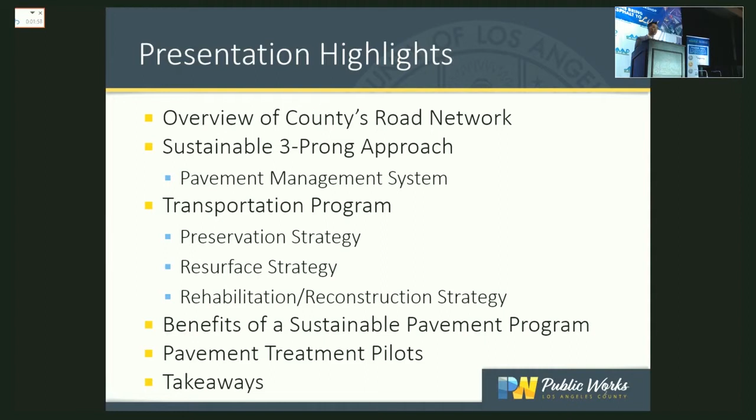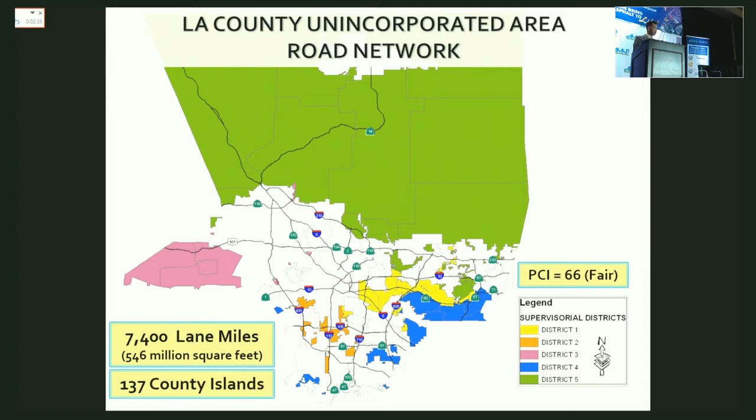Los Angeles County maintains one of the largest county road networks in California. We maintain 7,400 lane miles of all sorts of roads, and the challenge is really spread out across 137 county islands. Our current pavement condition index, PCI, is 66, in fair condition. The different color coding represents the 5 supervisorial districts, the way it's broken down, and the white area is cities, so city of Los Angeles as well as other small cities.

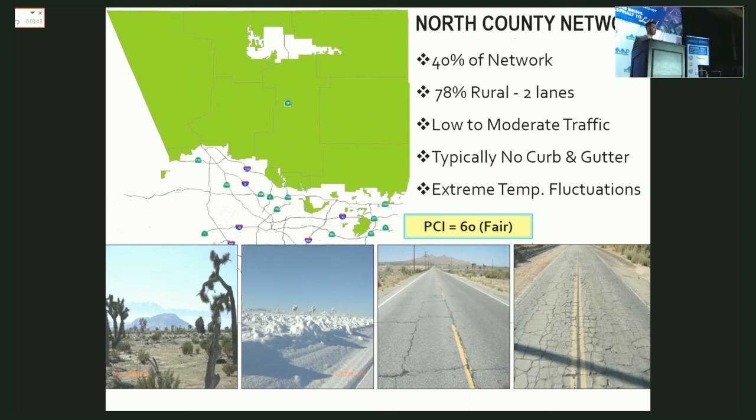So the way our county is broken up is into 2 different regions. In the North County, it's 40% of our network, pretty rural, with very much low to moderate traffic. Obviously, there are some high truck traffic routes as well, and those are pretty challenging. Usually there's no curb and gutter, mostly rural, with extreme temperature fluctuation. In wintertime, we do get snow up there. During the summer season, it's well beyond 110, 120 degrees, so the roads get pretty cracked due to the thermal experience.

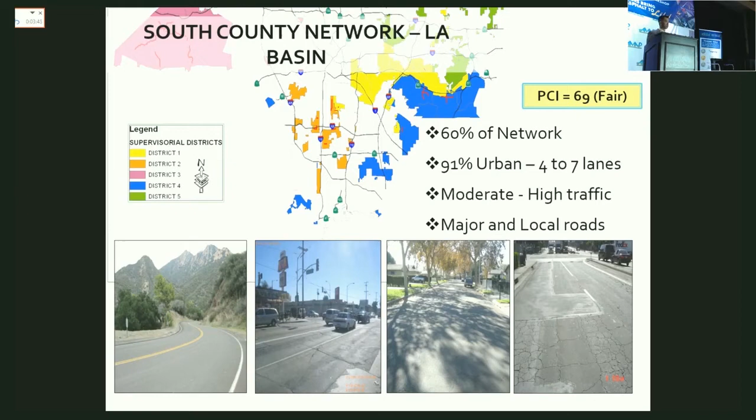Down in the basin, this is the majority of our network, including the Malibu area, which is in pink - that's our District 3. The majority is urbanized, local residential, as well as major arterials. So it's pretty busy down there, and our condition is 69 - generally speaking, in better condition than the North County.

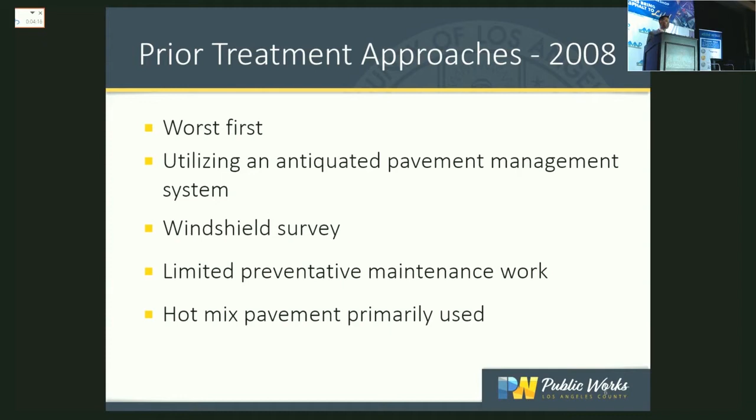Before 2008, we considered ourselves a worst-first organization. We basically waited till roads got into really bad condition before we'd go and fix it. We didn't have a really good pavement management software, and mostly we didn't have a lot of preservation treatment tools that we used. So mostly when we did fix the road, generally speaking it was hot mix overlay, reconstruction - a lot of remove and replace sort of treatment.

With the economy crash around 2008, we pretty much had budgetary issues that we were facing, just like any other public agencies, and we had to figure out a way to do a better job maintaining our roads with limited budgets. At the same time, there was a big push in California to really reduce greenhouse gas. Brandon Miller spoke yesterday a bit about the different Assembly Bills, and Assembly Bill 32 was one that aimed to reduce greenhouse gas basically to 1990 levels by 2020 - this has probably changed since. But from there, we were pretty much looking for ways to do that.

So we basically attended different conferences just like this one and really got to know more about what other agencies are doing, working with and partnering with contractors and material suppliers, and finding ways to really do a better job maintaining the road network and reducing greenhouse gas.

This is what we developed since then - our sustainable three-pronged approach. We really wanted to start with, number one, preserving our pavements when they're in good condition - we're talking about PCI. We also want to preserve roads that are in fair and poor condition. I'll dive into that a little bit more later.

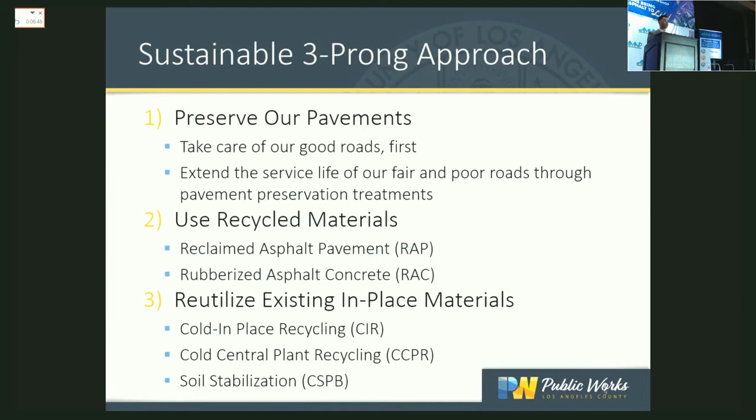With the three-pronged approach, our pavement management system is really what ties everything together. We need to know our network conditions before we can do anything, so having a good, robust pavement management system is key. We keep track of the condition of our whole network, and this software has GIS capability, so we're able to visually see the conditions of our network.

When we do, we collect the data. We have both in-house people that do it, as well as a contractor that does it for us. For the North County, it's a pretty far drive, so we have a contractor collecting pavement condition distresses for us, and those distresses get imported into our pavement management system, which is where the PCI is generated.

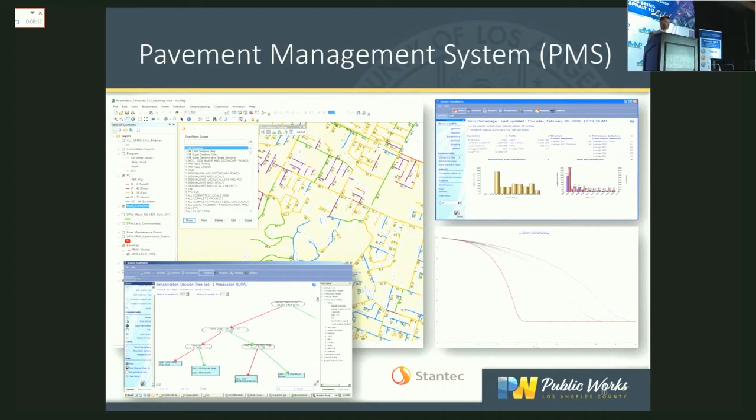This is a set of pavement performance prediction curves in the software, and you're probably familiar with it. Basically every road in the county is tied to one of these curves, and it's correlated to three elements: the pavement structure, the traffic volume, and the subgrade conditions. Depending what it is, it would deteriorate at different rates.

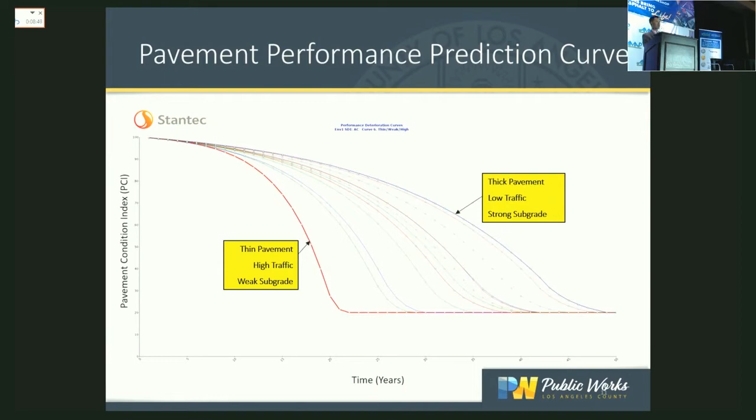Just a quick example: you have a road that has pretty good structure, low traffic, and very good subgrade strength - then you see that deteriorate much slower than the opposite.

This really zooms into a typical performance prediction curve. The way we broke down our conditions, PCI is in 5 different categories. People do it a little bit differently, but from our perspective, the score is from 0 to 100. On the y-axis, you'll see 0 where the roads completely fail, and 100 is like a brand new street. The x-axis is just the time.

The way we were operating before 2008 were really in the red zone, so we're focusing more on the lower end of the curve. We go ahead and fix roads when they're falling apart, but we realized how critical it was to preserve our roads when they're in good conditions.

So with that being said, we do a lot of preservation treatments when roads are in good conditions. You can see in the yellow box where the cost per square foot is very low when you're doing those types of maintenance treatments - talking about 5 cents to 80 cents per square foot.

But at the same time, I mentioned that we do preservation for roads that are in those critical zones. In this graph here, you'll see the dotted zone - those are the critical zones. We want to catch the roads before they get into the next worse conditions, because as the conditions fall into a different category, the cost to repair them is a lot more.

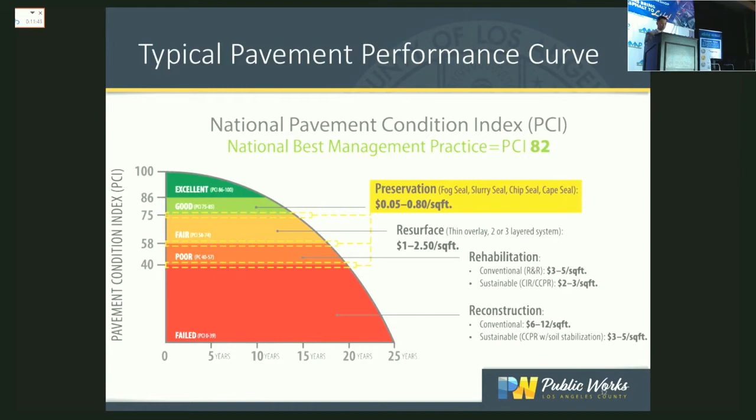Let's talk a little bit about our program. We developed a rolling 5-year plan. In it, you've got all sorts of project areas and different treatments we want to focus on, and it's all driven by PCI. We work with our internal partners to prioritize the different project areas to make sure it's balanced between the supervisory district and the road maintenance district. That's the game we have to play to make sure everybody gets a piece of the funding and road projects.

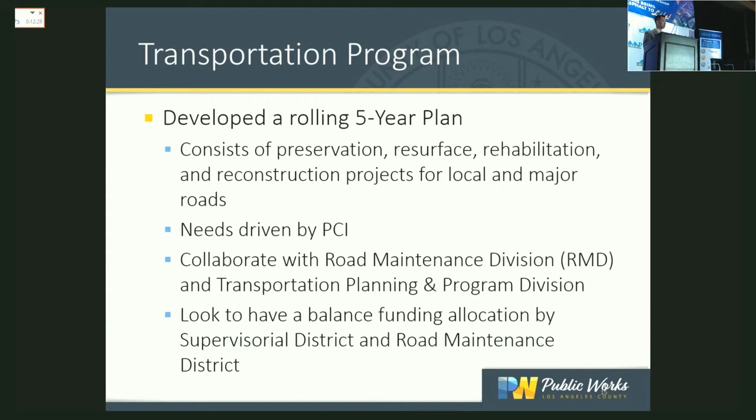So the number one strategy is preservation. Like I mentioned, PCI of 76 and above is in good condition, and we want to use preservation treatment there, things like slurry seal, fog seal, chip seal. But we also use it in fair and poor conditions. When it gets into those conditions, we're looking more into Cape Seal. It's no different, it's the same contractor that does the work, so it's a very cost-effective method to maintain the conditions.

The nice thing I want to share is that we actually use 100% RAP for the seal coat, meaning 100% on the slurry. We use polymer modified emulsion RAP slurry, it's 100% RAP, and the scrub seal, which is a form of chip seal, that's also 100% RAP. And in the micro-surfacing we're also using 100% RAP. The source isn't coming from us, we low bid so contractors come up with the RAP, and we haven't had any problems with that. It's very comparable in cost, so we're not really seeing a difference.

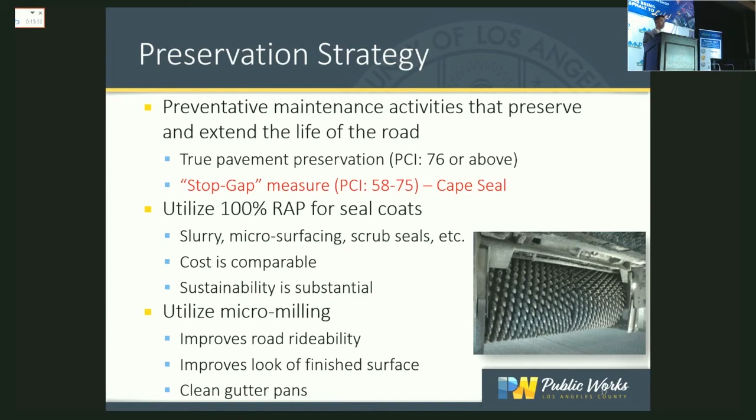Just to highlight, call it a stopgap measure when we're doing a Cape Seal for roads in fair and poor conditions. This is just a table we share, about when we do a seal coat treatment, roads in fair conditions versus worse conditions have a very different expected life. It's different, so it's just knowing that in the back of our mind and sharing that information with our administration so we're all on the same page. Because when we go into a neighborhood or community, roads are deteriorating at different rates, and we're doing everything the same to keep everyone happy, but certain roads are obviously in worse conditions than others. So this table kind of shows you that information.

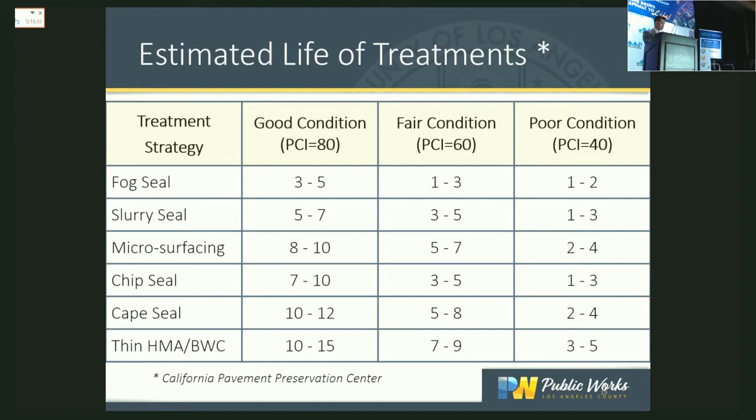So this is a sample project we did about 3 years ago, in one of the communities down in South San Gabriel. What we did was a stopgap measure. Let's go over it quickly: it's 11.7 miles combined, and conditions on average are 59, which is in the lower end of the fair curve, with alligator cracking, transverse and longitudinal cracking. Those are typical cracks we see in residential areas.

What we did was go in, do prep AC digouts for areas in worse condition, and then come back and do either a slurry seal—we used polymer modified emulsions for the slurry seal—or a Cape Seal along with micromilling. The cost of doing this project was 72 cents per square foot, and we were able to cover 1.9 million square feet within that contract cost.

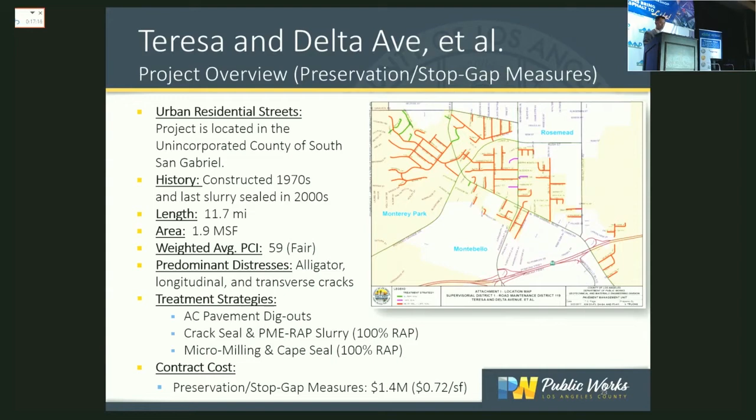Just a few pictures of what it looked like before, what it looked like after we did the micromilling, and then after we applied the scrub seal and slurry seal.

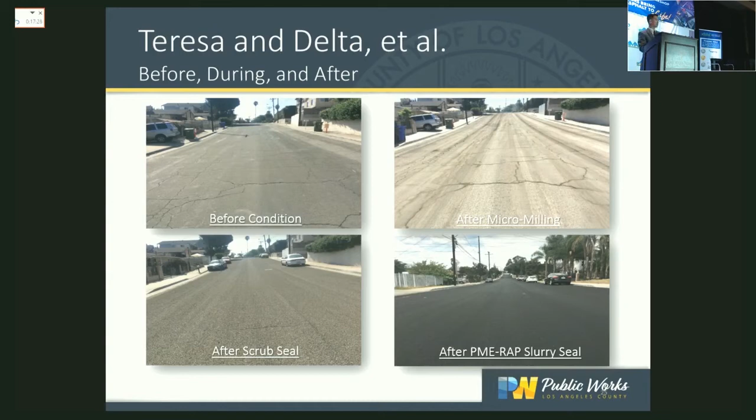The beauty is there's a lot of greenhouse gas reductions when we compare it to a traditional way of fixing these roads, plus energy consumption reduction. The cost comparison is not all straightforward, but we're looking at the life extension from a cape seal to a full reconstruction.

Like I mentioned, a lot of these streets we cannot resurface, so what we're comparing is reconstruction, which is basically a brand new street giving it a 25-year life, versus a cape seal which will generally give it 7 years of life. We scale that back into a single cycle of treatment, and that's the money we're saving - not really saving, but it's the money we don't have at the beginning. So we're actually able to do this much square footage with the money we had.

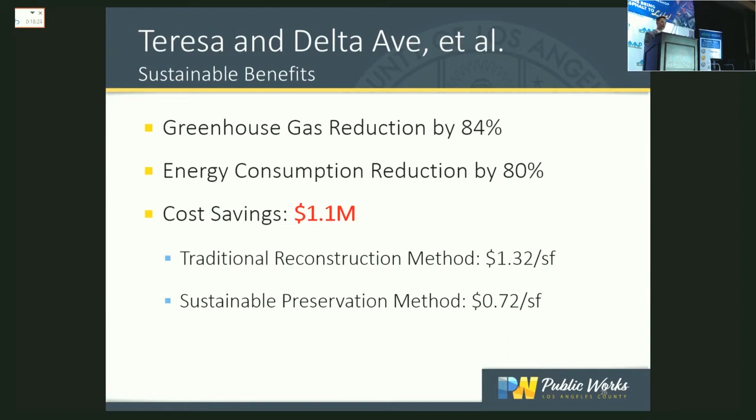The resurfacing - this is the rubberized asphalt concrete we talked about. The statement here is that it's roughly 1,000 tires being recycled for every 1 inch of overlay, and this is from Cal Recycle, the California website. So we use both the gap graded field blend wet process, and we also use terminal blend.

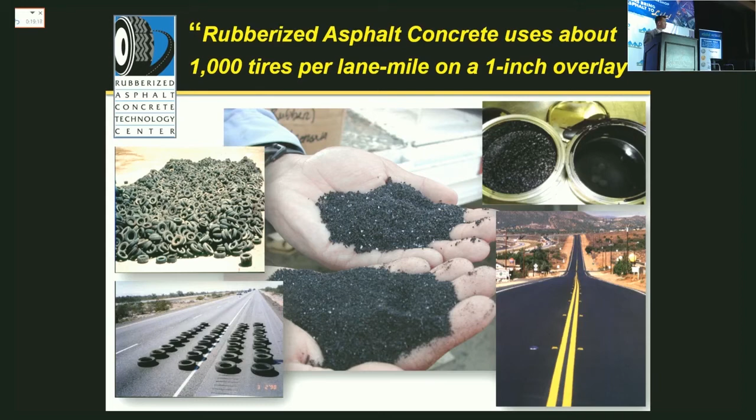From yesterday, a little bit on the rubberized hot mix - we have done it since the early 90s. We found that it lasts longer, stays dark longer, and is really good with reflective cracking, so there's a lot of good to it. As the state of California, we are committed to using more recycled tire in our asphalt.

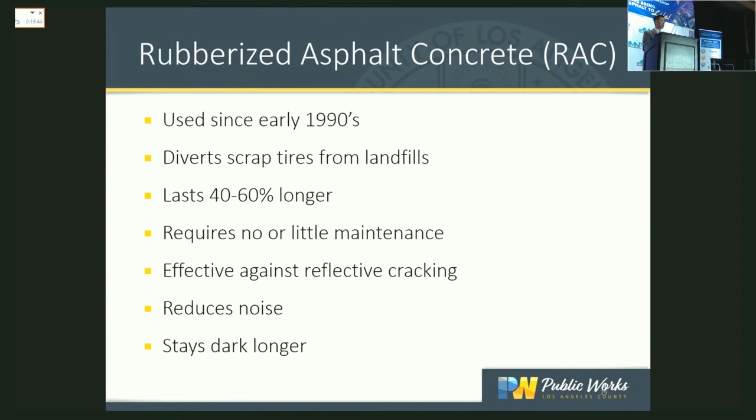So in the reconstruction world, that's when we are looking at full depth reclamation. Since the county uses the Green Book, the term is cement stabilized pulverized base. What we're doing here is, in place, reusing the existing base and existing asphalt, adding cement as an additive to strengthen the foundation before we place a layer of asphalt.

That has been a huge push, because there's a lot of savings we see from that work - we no longer need to remove all the good aggregate that was built on the original structure, so we don't need to haul that material away. We're actually able to reuse it in place, and you get savings on the landfill because that material isn't being dumped somewhere, since you can't reuse unclassified excavated materials. All of that has just been amazing.

Not only that, the construction duration is a lot better compared to having to excavate down 12 to 15 inches. We no longer need to do that.

Then the second element is the asphalt. We're using a lot of cold-in-place recycling as well as cold central plant recycling. I have a couple projects I'm going to show you, but the idea is to reuse as much as we can. We've been doing that since 2009, so it's a lot of projects we've done, and it's been a successful journey, but by no means can we not improve.

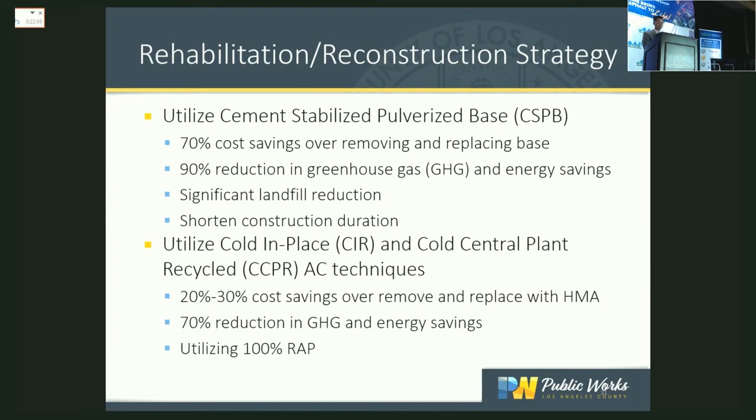So El Segundo - this is a project we did a few years back. It's a major arterial.

It's pretty cracked up, and the PCI is 41, in poor conditions - just borderline fail and poor. It's 4 to 6 lanes, a major arterial, and it has a pretty good pavement structure. You've got 5 to 8.5 inches of AC, and a good layer of base underneath.

So this was the strategy, to rehab. What we did was put back a section that's 1.5 inch of rubberized AC on 3 inches of cold-in-place recycling, and the cost is $1.80 per square foot.

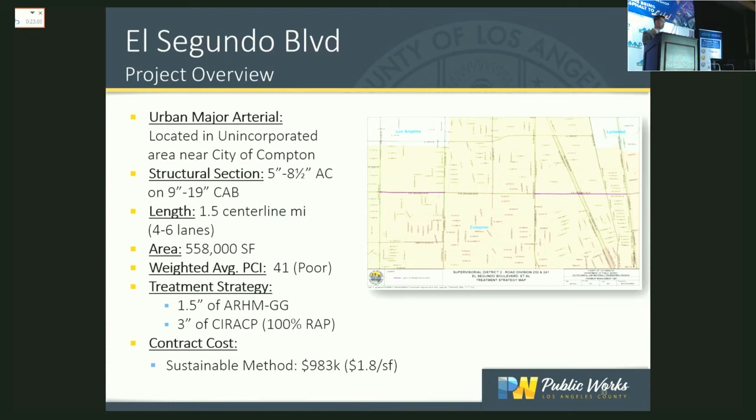So I'll just give you a few pictures. This is the before conditions. First, they have to cold mill down 1.5 inches, because you've got the edge gutters that you have to maintain. So you take that 1.5 inches out, and the remaining is what we're recycling - basically 3 inches.

This is always a good picture that we share with other agencies. This is the cold-in-place recycling train.

What we're doing here is, from left to right, you have the cold milling machine. This is where it's cold milling 3 inches down, and all that material is being transported into the recycling unit. In there, that's where the emulsion, water, and different additives are rejuvenating the material. Then from there, they put it right back onto a windrow underneath, and the paver is at the very end.

The cool thing with this process is that you stand at one point, and when the train goes through, 5 minutes later you're going to see a new pavement underneath. This is one of our favorite treatments. But because of the size of the equipment, we only use it on arterial roads, not on residential.

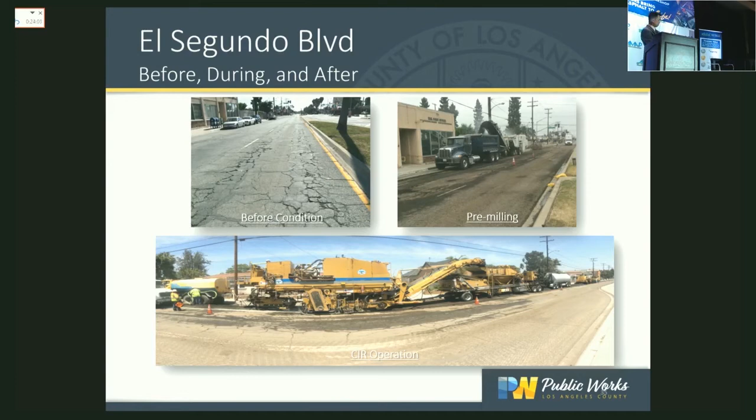And then this is just paving the CIR, no different than any kind of paving. The final course is the ARHM - it's a gap-graded ARHM, is what we call it.

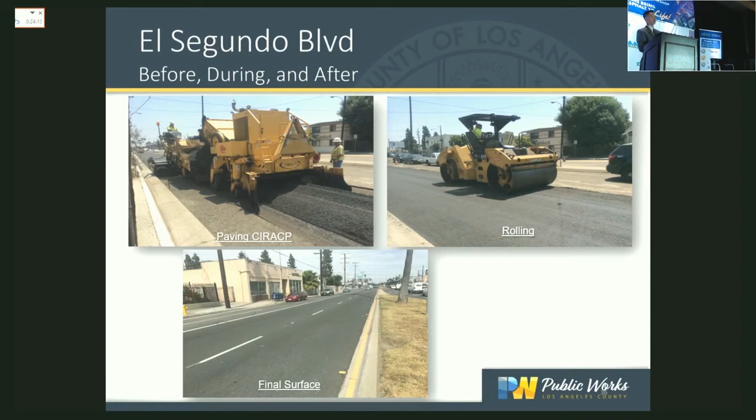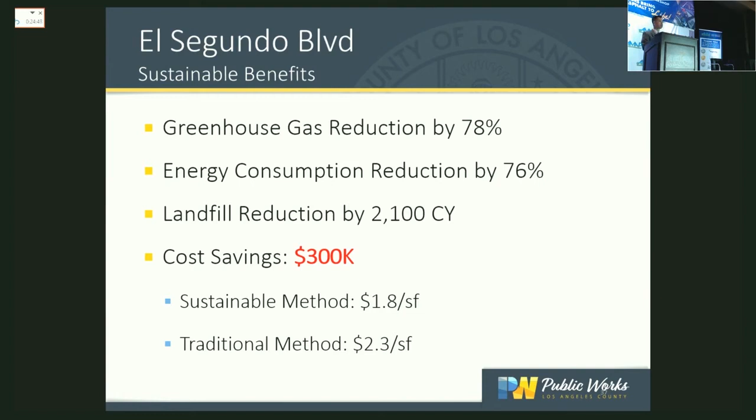So the greenhouse gas aspect, energy consumption, these are all good stuff. Reduction in landfill is basically that 3 inches of AC we no longer need to haul into a landfill. Obviously the AC can be reused in the HMA, but in this case we're reusing it on the project in place. The cost saving, when we compare it to a remove-and-replace treatment method, there's cost saving. So it's good for the environment, and it's saving money. So why not?

Next is Susana Road. This is more in the reconstruction world, and it's kind of near the city of Long Beach.

It was structurally inadequate, so we had to reconstruct it as a major arterial, 4 lanes, 2 lanes in each direction. Since it's a truck route with a pretty high traffic index, for higher traffic index truck routes we generally want to use either polymer modified AC or terminal blend AC.

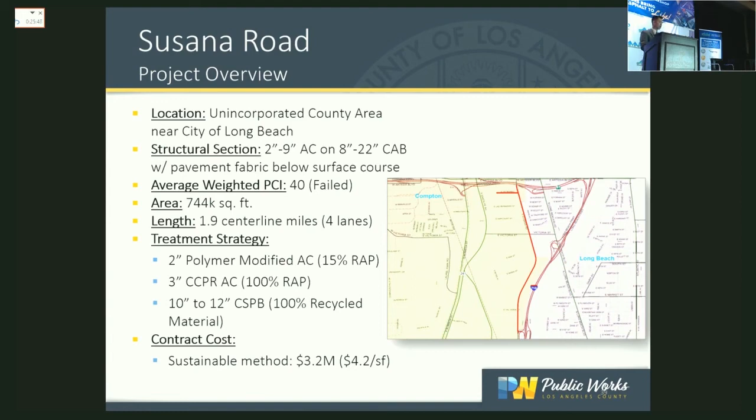In this case, we used 2 inches of PMAC on 3 inches of cold central plant recycling AC, and then put all that onto 10 to 12 inches of CSPB. The contract cost is $3.2 million, about $4.20 per square foot.

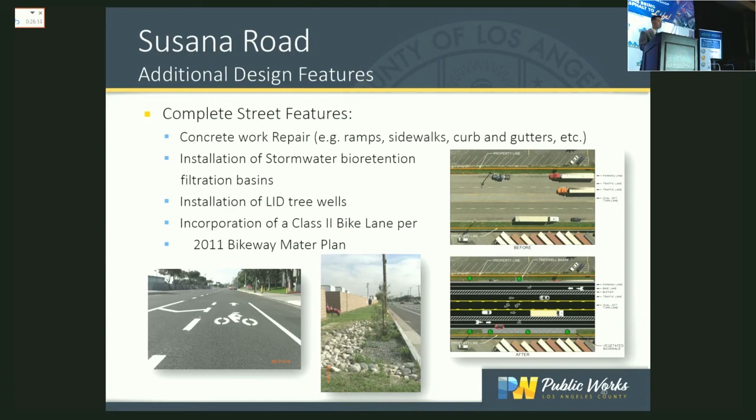Along with that, we basically added some low impact development features, bioswale, and a bike lane. So everything is no different than a traditional project - we're just saying that the sustainable method is no different. We're actually just improving our roads with a lower cost.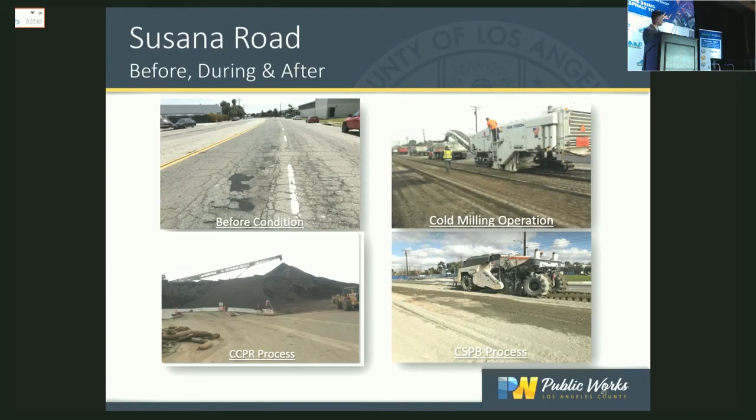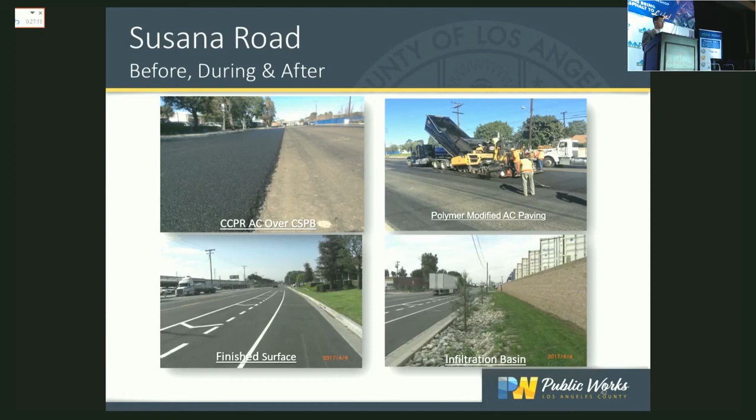And then once the CSPB is nice and cured, that's when we bring back the recycled AC, pave that, and then the PMAC is put down on top - that's the final surface. So this one has a huge amount of savings compared to a traditional reconstruction.

The greenhouse and everything is all there. Landfill reduction, as you can see, that 10-12 inches of CSPB could have been CMB or CAB, but we're not. We're using what is there.

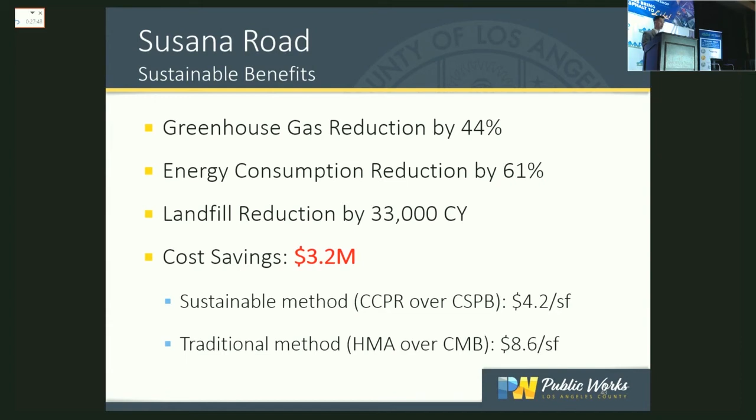And so then the AC itself, a lot of those are being promoted on every project that we are doing. If we see it fit, that's when we are pursuing it. And so as you can see, compared to a traditional remove and replace, it's a huge difference.

Just to summarize the benefits: we got the cost savings, we got the environmental aspect, we're able to maintain the natural resources. I live in LA, I drive to work every day, and there's a mine pit, a hill where they're cutting into those hills further and further. From a resident's perspective, driving on the freeway, you can see that. So what we're doing is helping to reduce that, and it actually speeds up the construction process. Overall, it's an approach that we think is very sustainable.

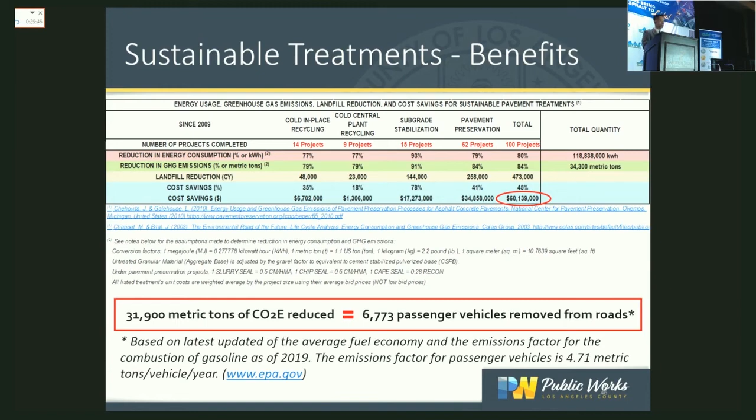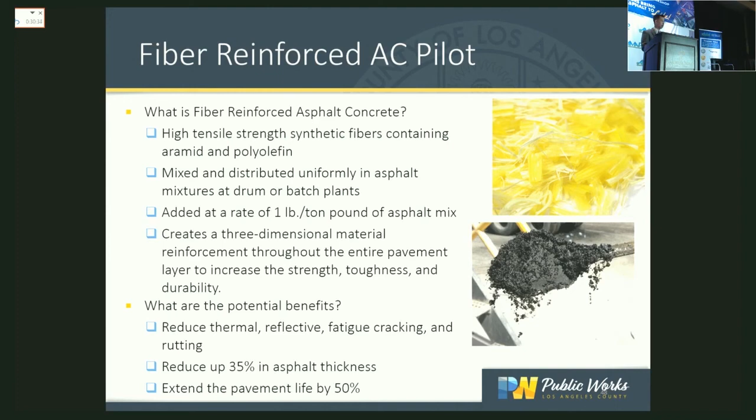Just want to highlight some pilot projects we have done the last few years. One that came to mind was the fiber reinforced AC. We did some pilots up in the North County because that's kind of our testing ground, not as vocal with the residents. It's synthetic fiber containing aramid and polyolefin, just fiber, and it's being mixed into the drum or at the plant. It increased the cost a little bit, but what it's doing is supposed to improve the longevity of the performance of the AC, so that's kind of the idea behind it.

We did 3 pilot projects up in the North County, pretty beat up roads. The strategy is a little different. Again, 40% of the network in the North County doesn't mean they get 40% of the funding. So we gotta be careful, because with low volume roads, sometimes it's just hard to commit a lot of money up there. So we're constantly looking for new methods to maintain the roads up there, and this is just one of many.

At the end, it's about $10 per ton additional to the asphalt. We had a little issue at the beginning—the plant mix was not done sufficiently, so you got clumps of fiber. After paving, we found clumps of fiber on the surface course. But it's just a learning process, we're going to continue to evaluate how it performed. So we did a side-by-side comparison, and that's something we're going to keep an eye on.

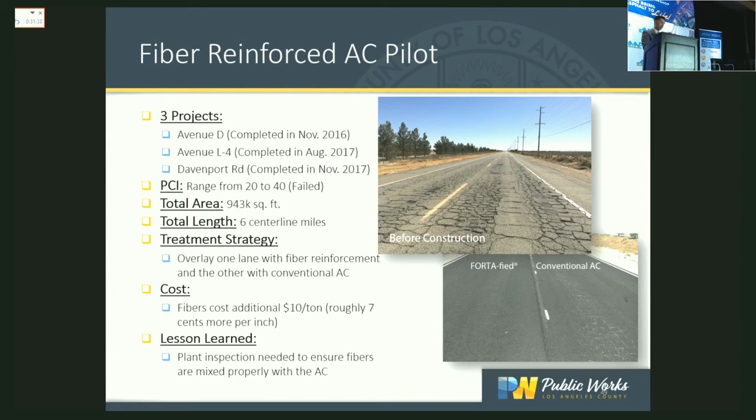Cool pavement—I think Brandon mentioned there's a huge push on cool pavement, but you gotta be careful about the unintended consequences of putting cool pavement everywhere. So what we did was, I think City of LA did some pilot projects a couple years ago, and we also got pushed by our supervisor that we need to do something. So we're piloting a project using cool pavement.

We're testing 4 different products for a whole big community, evaluating the performance of the 4 products to see which one does best. We're also teaming up with a university to collect temperature data before, during, and after. We just finished placing it, so there's data from before, not really data from now because it's winter season, but over the course of next summer we're going to continue to work with the university, and there should be a report on that.

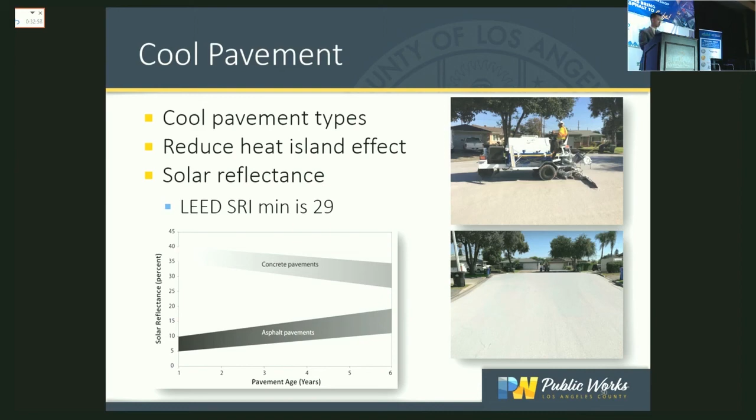Yeah, so it's just something to let you know. And then this is fairly new.

I know City of LA did something 15, 16 years ago. It was in that range of high RAP, and so far performance sounds like it's been performing well since 15, 16 years ago.

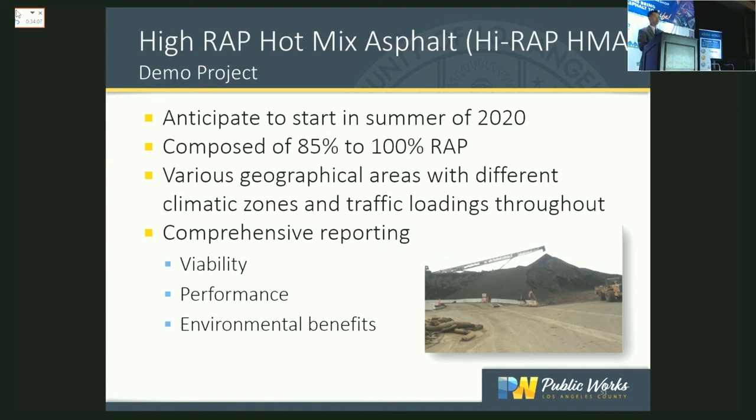And so now I think there's a push to come up with some money. The way I highlighted here is because I think the county is going to be selecting some of the county roads for this pilot project, and that's kind of our involvement. We'll keep you guys informed when there's a report that comes out.

Just some takeaways. Our approach wasn't easy. It took a lot of effort to learn from others, and coming to conferences like this really helped build our knowledge. We had to sell it to our administration, so all that work was quite a long journey.

Our boss is very committed to this approach, and he has been the driver on this. We work with our internal divisions to get everybody up to speed on the different technologies and techniques out there. We obviously do pilot projects at the beginning, and we constantly have to be persistent and remind ourselves not to go back to the old ways.

The ongoing collaboration and dialogue is important. Communicating with internal partners is key, and also learning from other agencies, county agencies, cities, and the DOT. All that is needed. And on the contractor and material side, I think we're definitely very excited to do that.

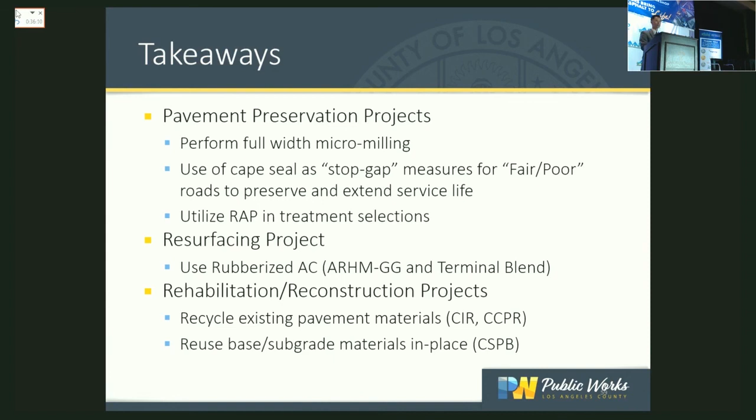And then finally, this is just the three-pronged approach. So when we work on a project, these are the things we think about first: preservation, resurfacing, and reconstruction. Our mind is pretty much focused on these things, and if there's anything new that would be incorporated into this, that's what we're going to continue to improve.

And that's the end of my presentation. Any questions? Thanks. Yeah, thank you.

Any questions for Van? Yes. Bob, okay, I'll get to you.

My question is, did you go with the milling as deep as taking out the fabric, or did you mill just above the fabric? What I remember was that it wasn't throughout, it was piecemeal, and our core actually didn't hit those areas until we were actually constructing. So what ended up happening was the milling hit the fabric, and we had to have the contractor get someone to manually take the fabric out from the RAP.